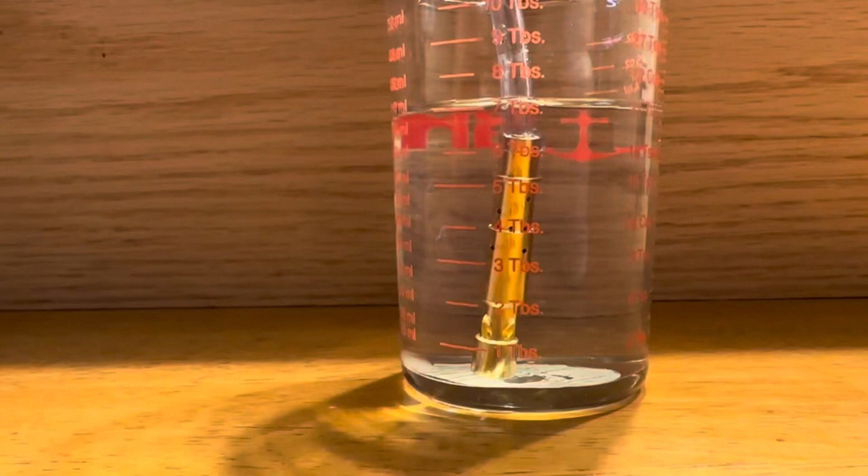All right, so this is an F11 Chinese emulsion tube, but that doesn't matter because this is basically just how fuel level and air pressure affects an emulsion tube and why it's important to set each individual location for the CFM the Venturi is seeing.

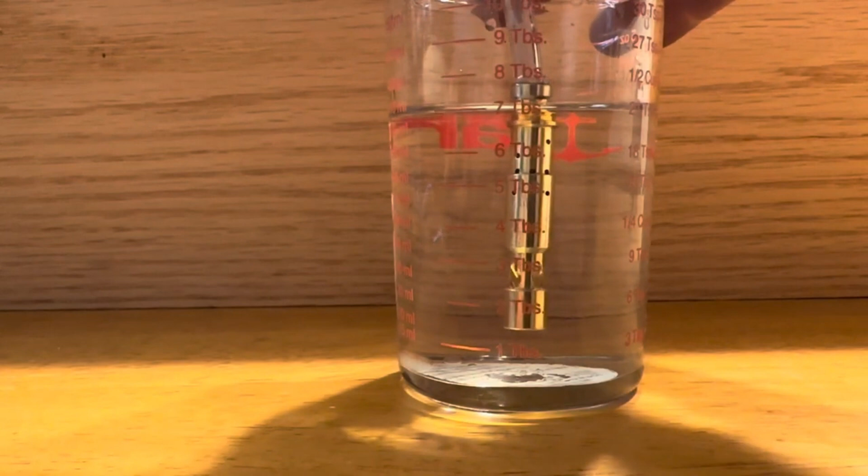So currently we have no airflow, and in the fuel chamber, the very top hole, you see right there, turn that, the very top hole there should be just below the fuel.

As your Venturi creates a pressure differential, you will start to see air introduced. This air emulsifies the fuel, pushing it much higher in the chamber and out through into the throttle bore.

As it increases in pressure, the fuel level should drop, moving to the second hole.

Now you see, if I put both under, all of the holes start bubbling. This is the situation you would have if you have not enough air for the CFM that the Venturi is seeing. It would be pulling in way too much fuel and drowning the holes, and so they would not operate properly.

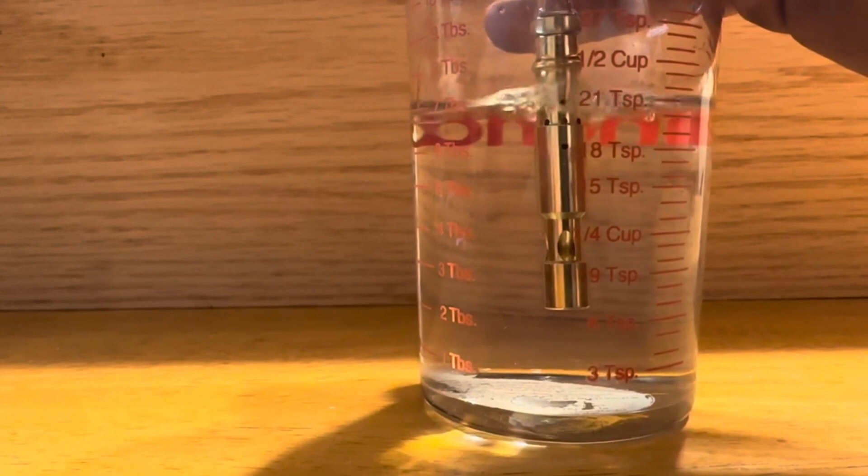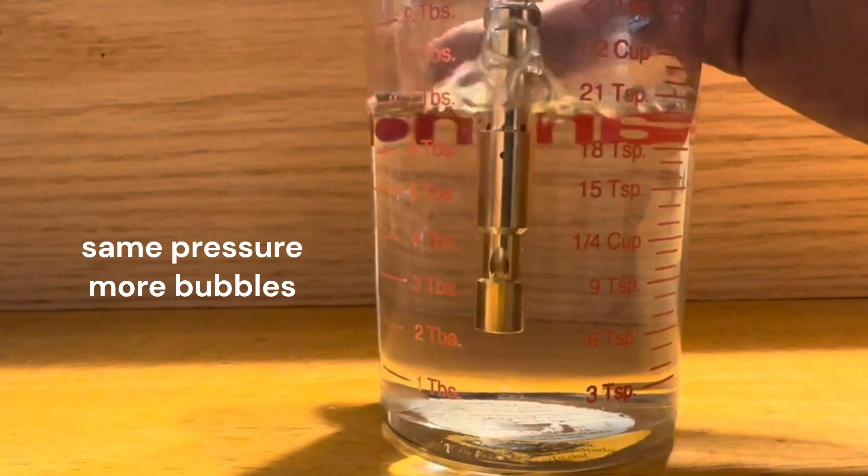And again, if we had too much, all the holes start bubbling and then you have a rich condition. So we're trying to tune each individual hole for the CFM that Venturi is seeing. That down a little bit.

And then again, if you go even higher, then you start to see the crown holes. This would be the very last CFM before you start to run mainly off of the main jet and the air idle bleed.

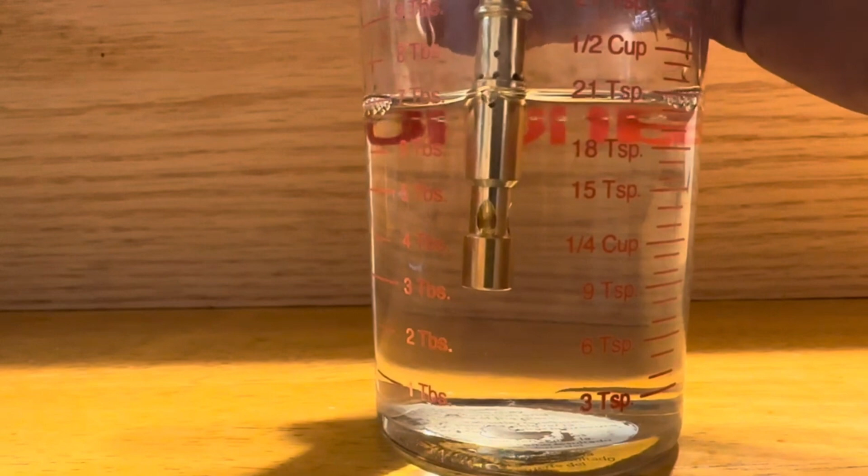If you see, the bottom holes, no matter how close they get into the top, do not bubble. Those holes are to fill the chamber when you decelerate, to let the fuel inside of the emulsion tube match what's on the outside.

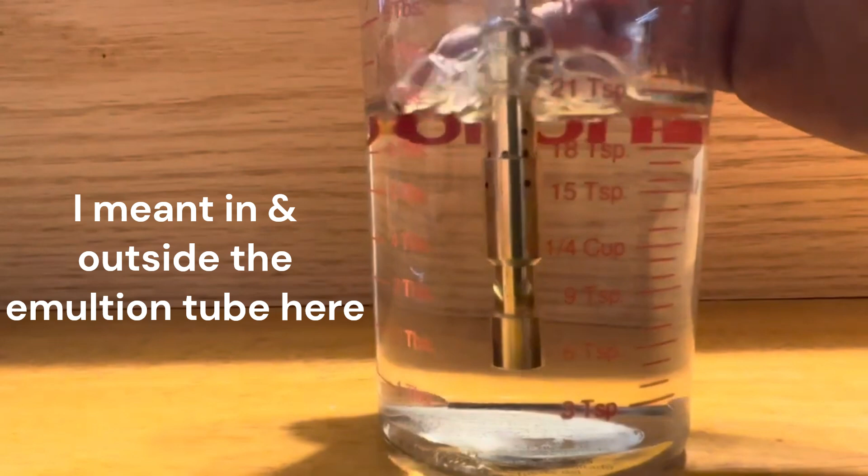Turn it down here. That will give you better fuel control.

Now under wide open throttle, I'm sure all of them bubble. Yes. Because at that point, these are no longer your metering air holes. Your air is now metered by your primary air bleed orifice.

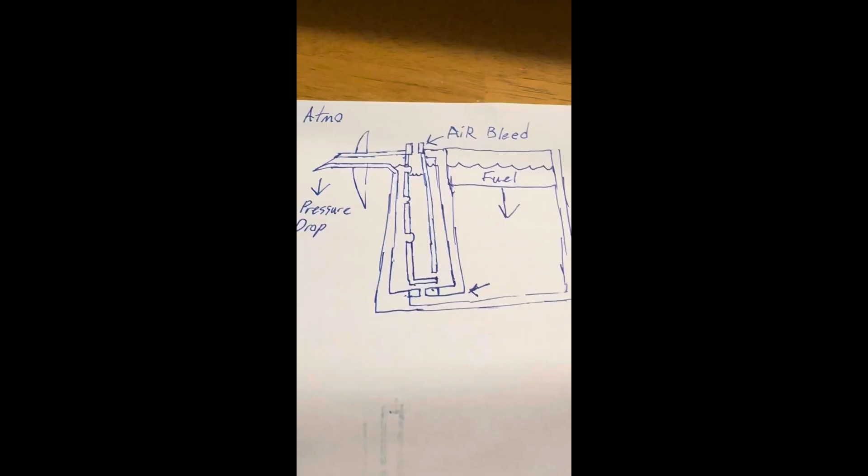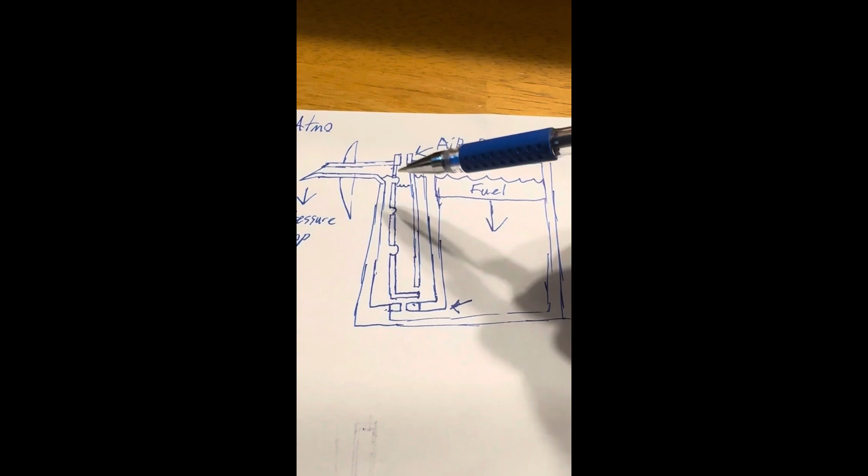All right, so here we have a diagram of the basic emulsion tube in like a Weber. We have our air bleed at the top of the emulsion tube, our main jet at the bottom. The outside of the emulsion tube fills up with fuel, but so does the inside of the emulsion tube. This would be to the Venturi.

Atmospheric pressure up here, pressure drop through the Venturi, and that's what changes the pressure on the outside of the emulsion tube.

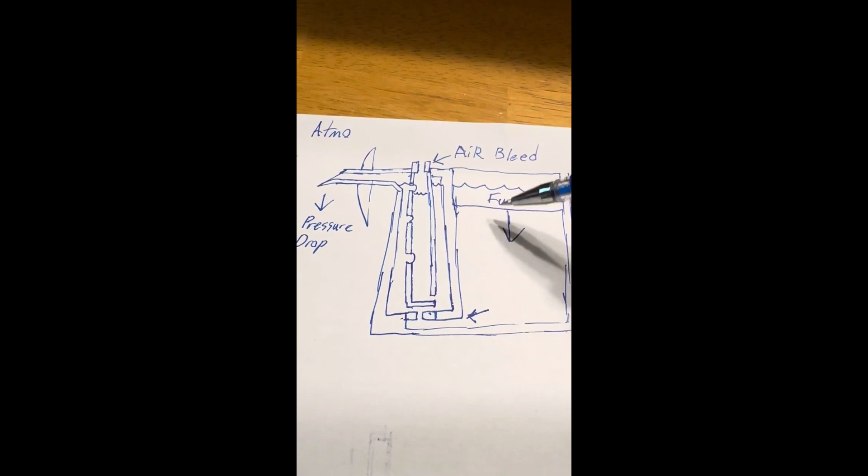Inside the fuel bowl, you have atmospheric pressure inside of the emulsion tube. Above the fuel, you have atmospheric pressure regulated by your air bleed under wide open throttle.

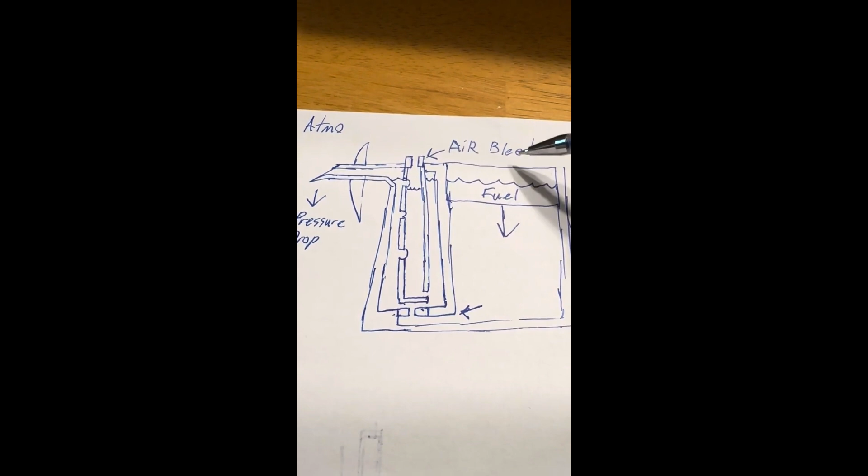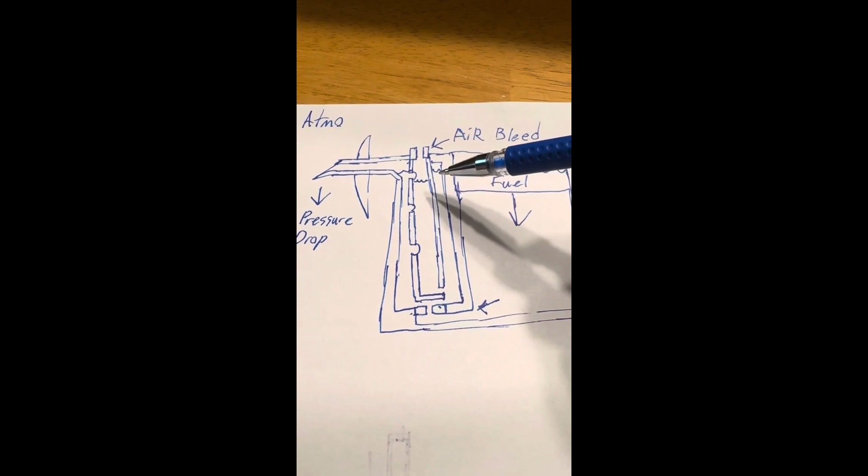As the pressure drops through your Venturi, it will lower the pressure inside the emulsion tube chamber, lower than the atmosphere in the fuel chamber. This will actually cause the fuel to rise. It will then overcome the offset of the hole, lifting the fuel above the emulsion tube hole.

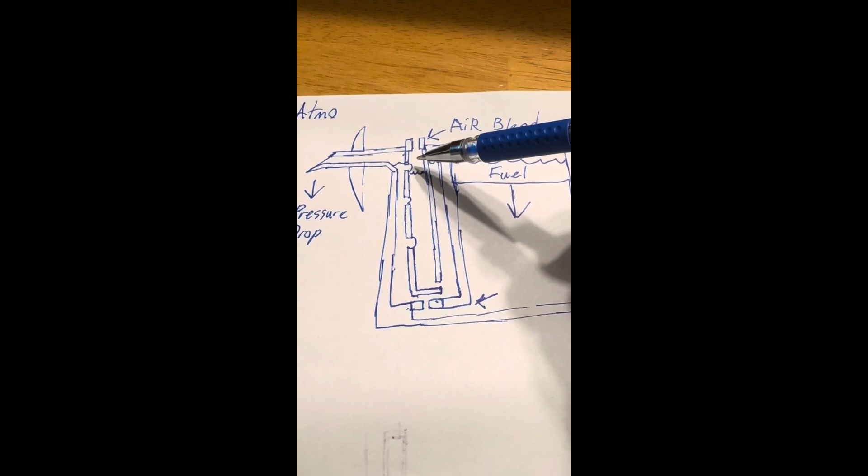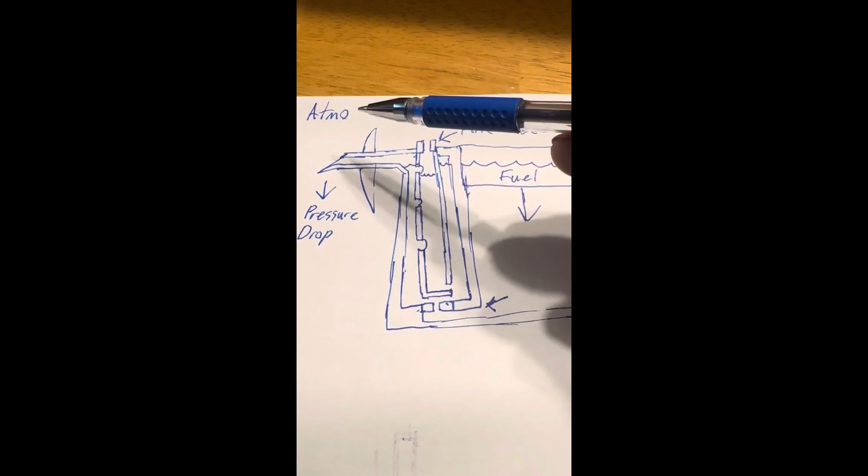This also creates a pressure drop from inside the emulsion tube to outside the emulsion tube. The air will begin to flow out of the emulsion tube and emulsify the fuel as it goes out into the Venturi. As the Venturi pressure, as the CFM through the Venturi increases, the pressure drop becomes greater.

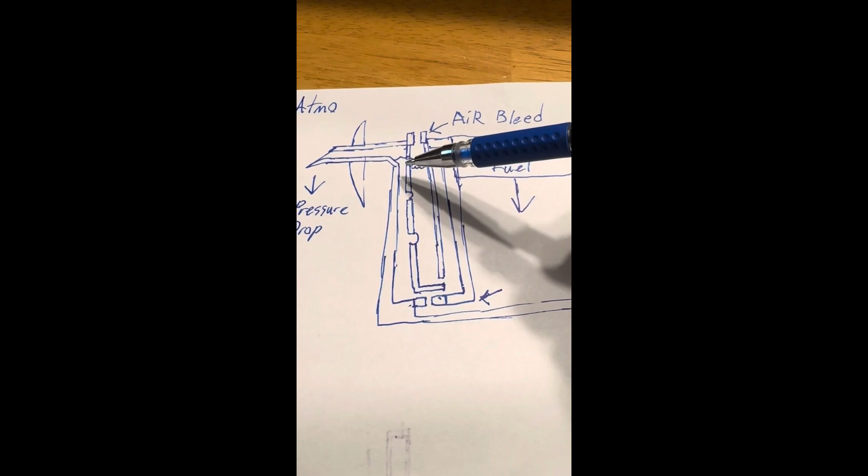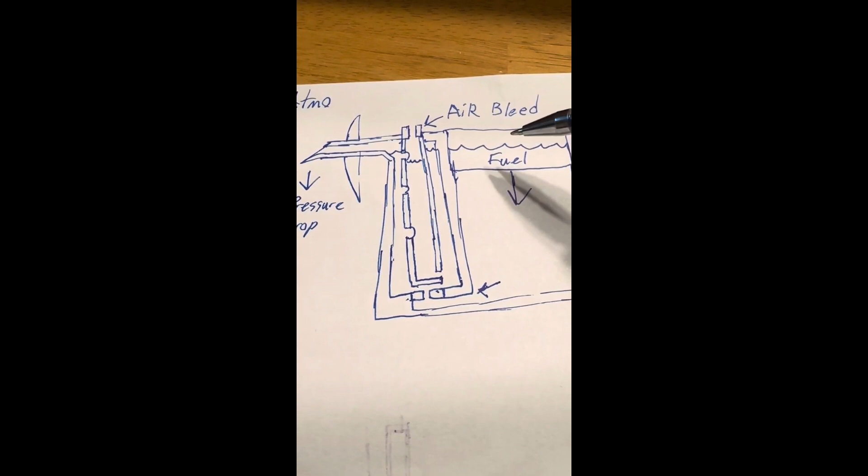Now, the trick to tuning these is you're trying to adjust your air-fuel ratio by how much air versus fuel is going through the tube. Now, this is fed from the air differential between inside the tube and the chamber, and that is adjusted by how many holes you have in your emulsion tube.

If you have one hole, it may overcome the hole, and like you saw in the video, more holes will start to flow because the fluid inside the emulsion tube will be pushed out, because this is the smaller diameter, so it takes a lot less pressure to push it out.

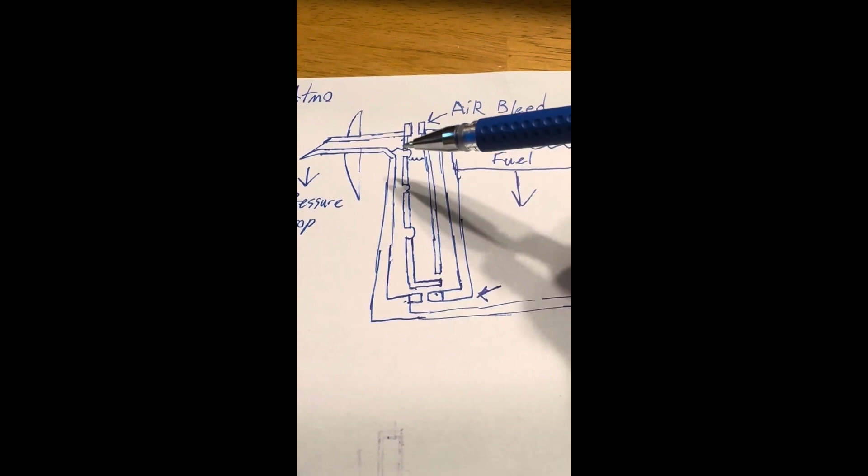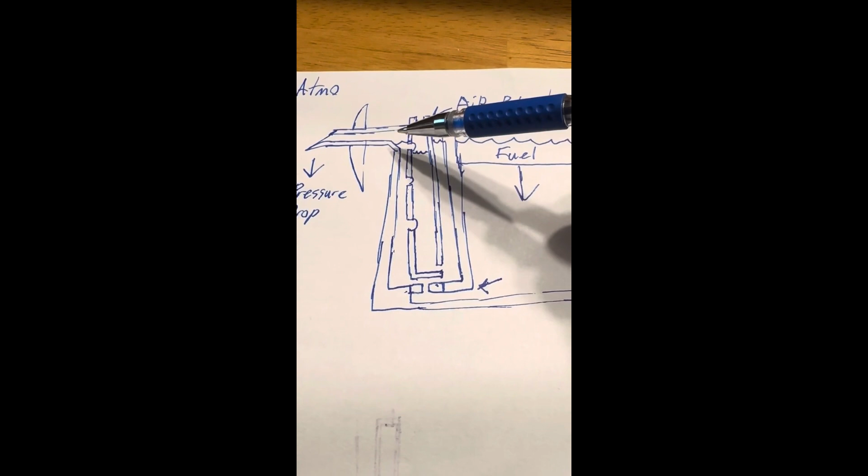If you have enough holes at your set CFM, so you have, say 30 CFM going through this, it's gonna have a set amount of pressure it drops. And that is what you try to tune this hole for. Not necessarily 30, that's just an arbitrary number I'm picking.

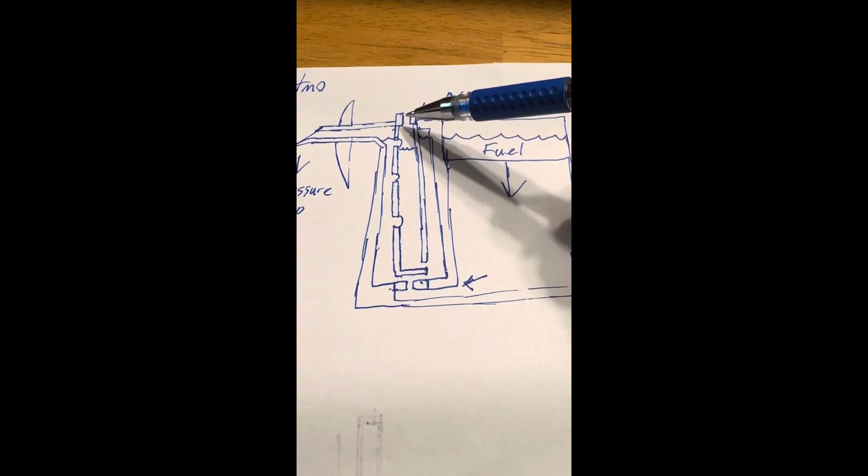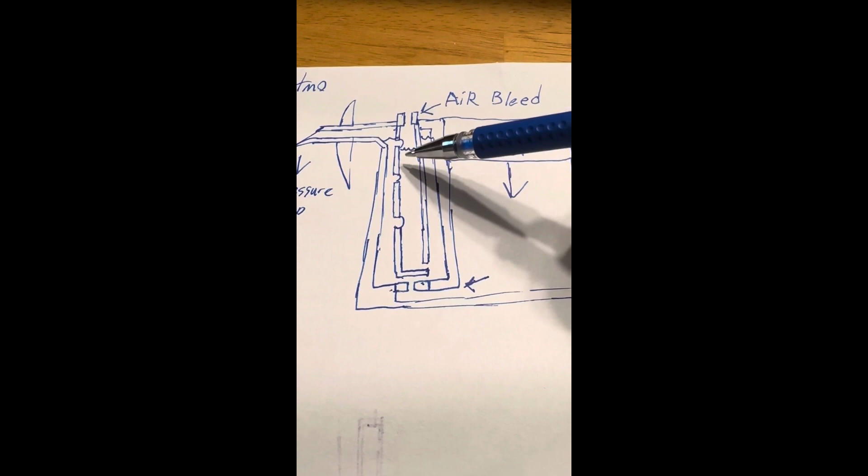Now this hole is going to have a range. As the fuel comes up, the range is going to be dictated by the internal level of the chamber, or of the emulsion tube.

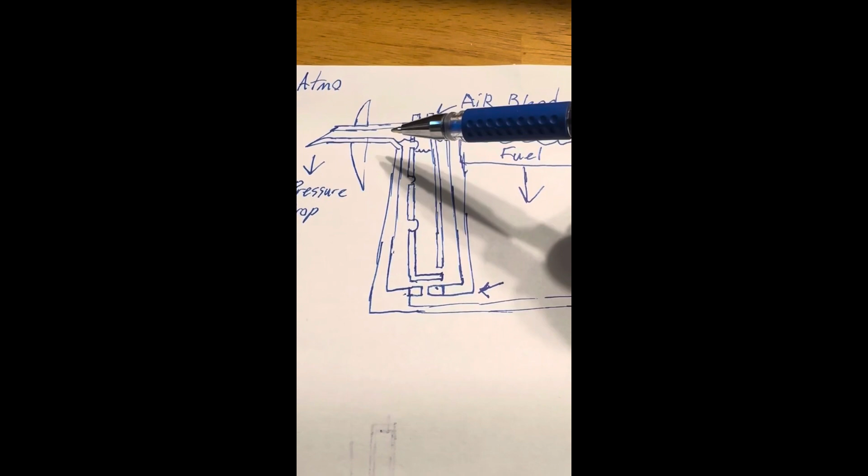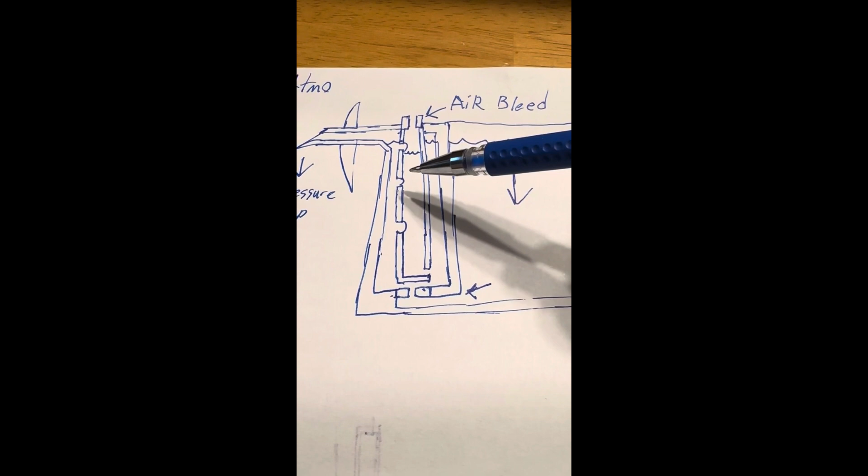As the CFM increases, the pressure differential between these two increases, providing more fuel and lowering the fuel level. So you will have a slight rich increase between this hole and this hole. So as this is transferring down to the secondary hole, you're going to have a slight enriching happen between the two holes.

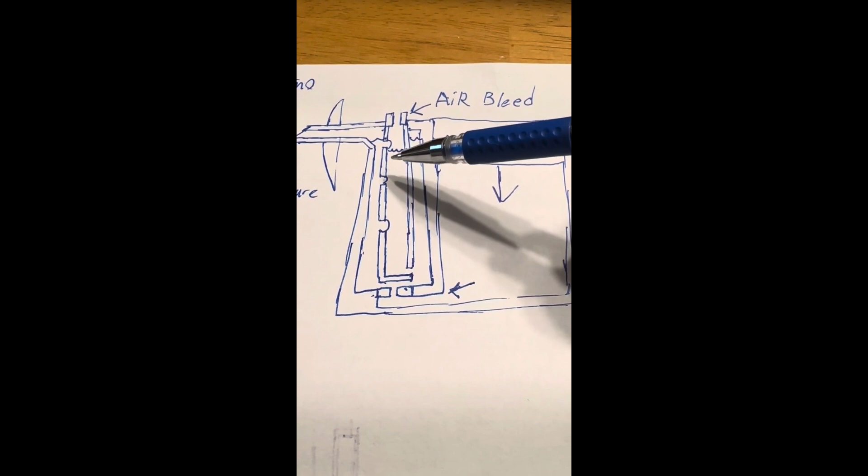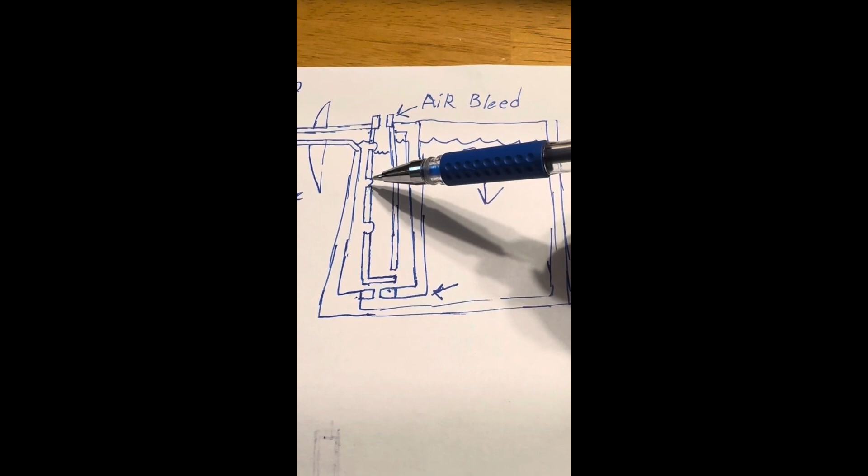Once this level drops to the point where this hole is, it will emulsify and push everything above it out, clearing this hole. You might have a little bounce back and forth, but you are now primarily off of this hole. This continues all the way down to the third hole. This is how you're tuning your emulsification tubes.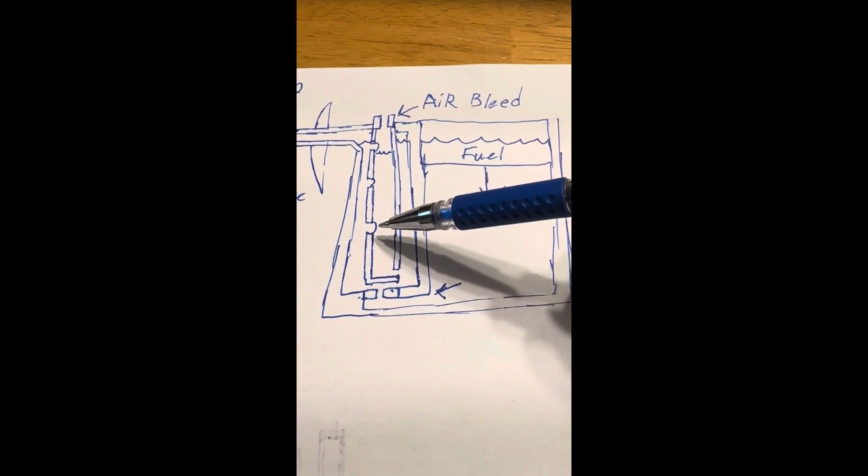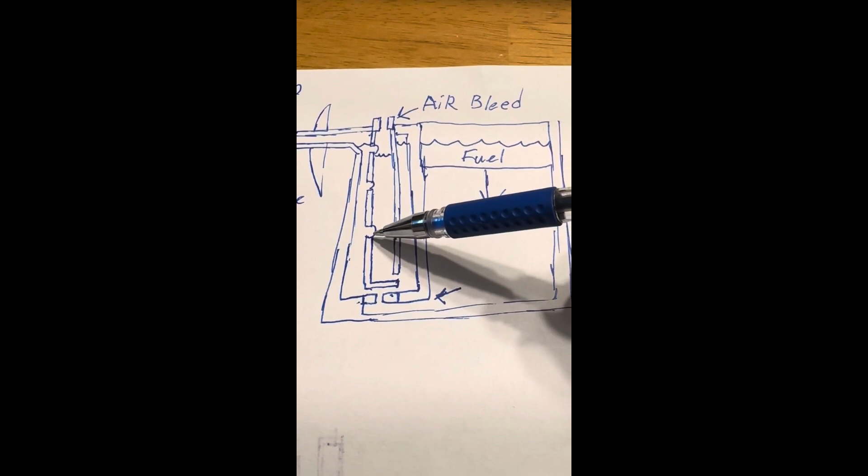If you're getting down to the very bottom hole, this hole here is to allow fuel in, so when you're letting off throttle, it fills back up with fuel and closes off these circuits for the air and helps regulate pressure.

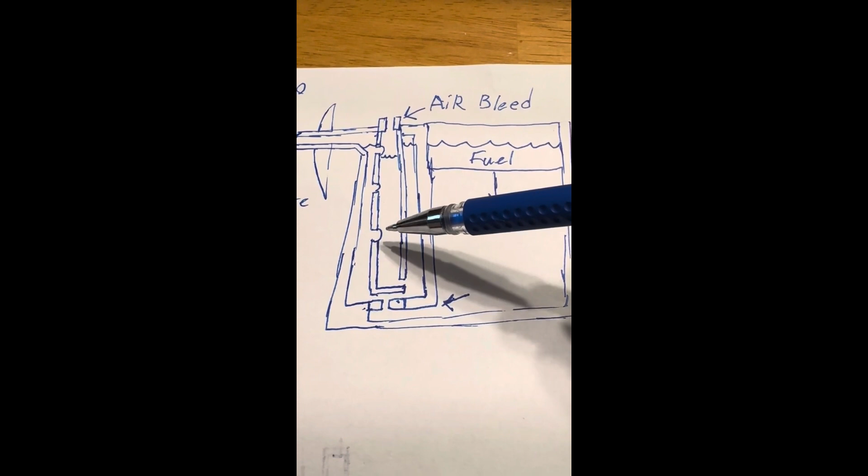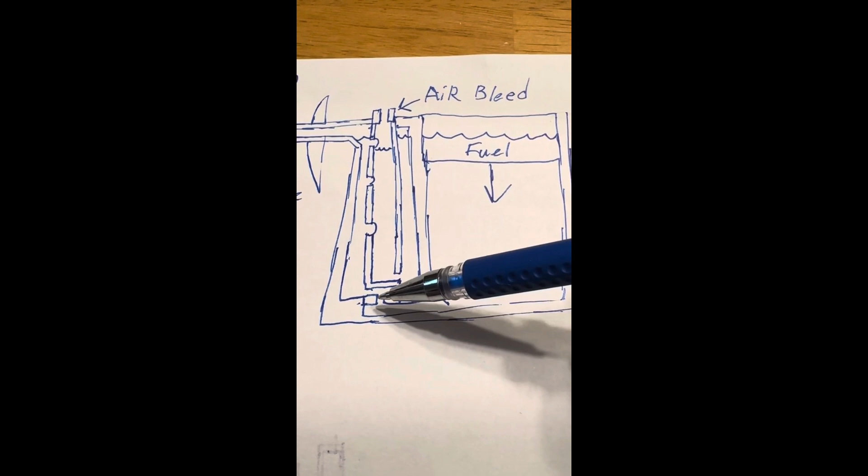Once you get down to here, once you run out of holes, there's no more adjustments you can make, and you're going to be running off of your air bleed diameter and your main jet diameter. So these should be set as if this doesn't exist.

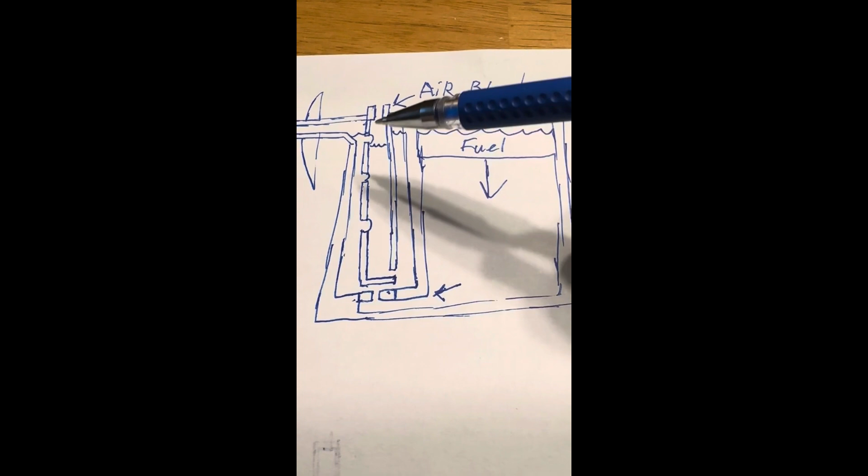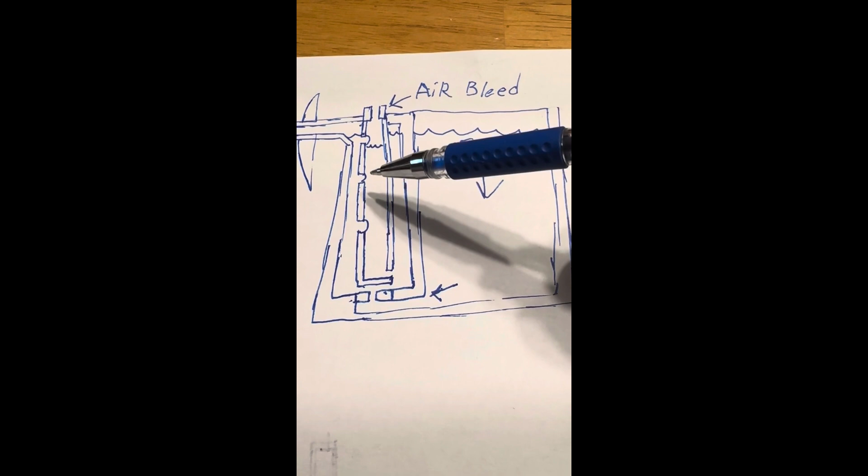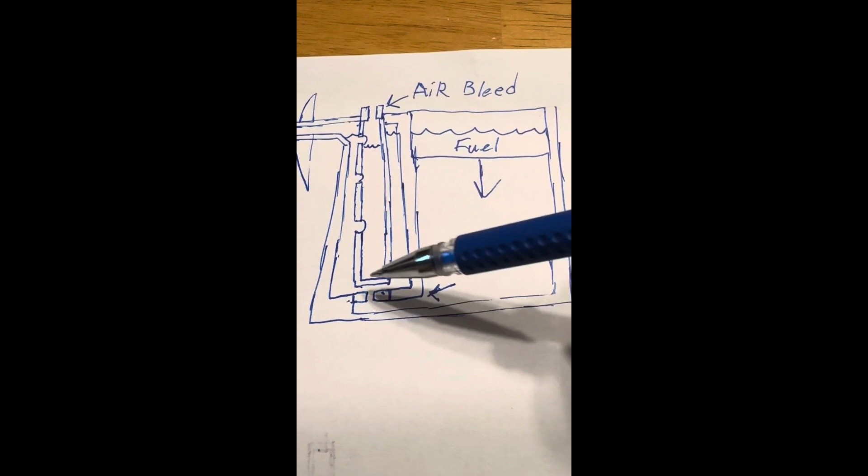You only have enough airflow regulated by your air bleed. You may run out of air bleed by the second hole, meaning this hole is not helping you tune your carburetor. This hole is only functional at wide open throttle and really doesn't do anything for you, because it doesn't matter how many holes you have in this if that doesn't flow enough.

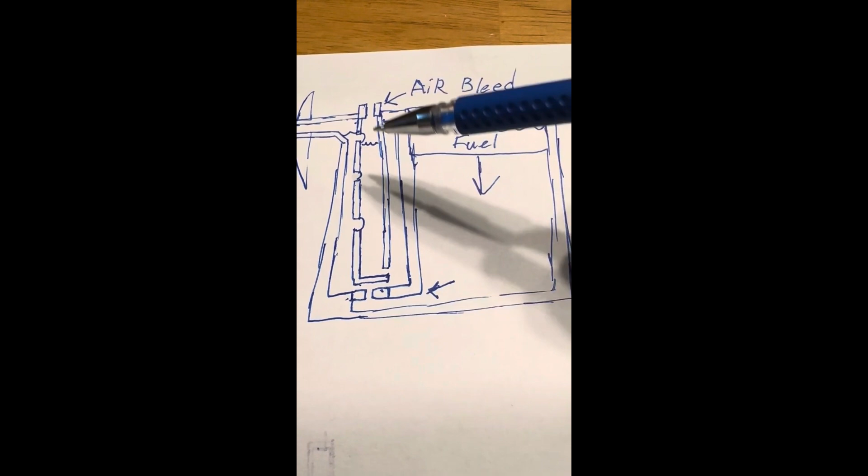So that is the limiting factor to how well you can tune these. You only have this much air for this much jet. Once you reach the maximum amount of air to jet ratio, it doesn't matter how many holes you have. So you have a limited amount you can put in. So you gotta plan it out wisely.

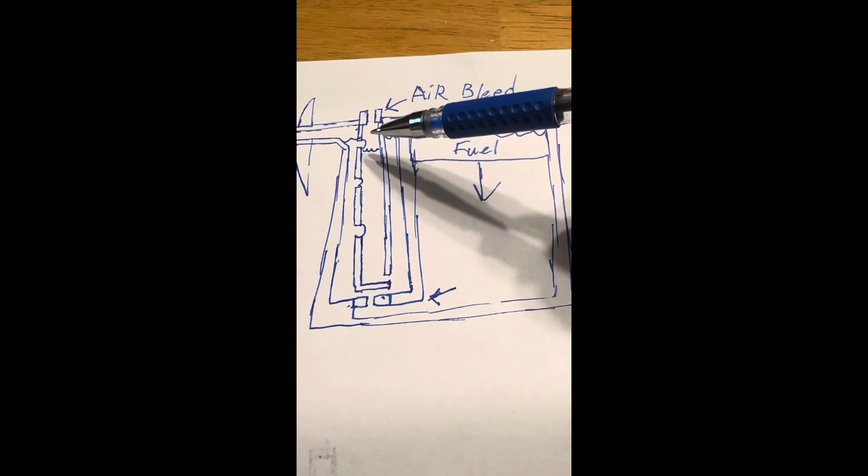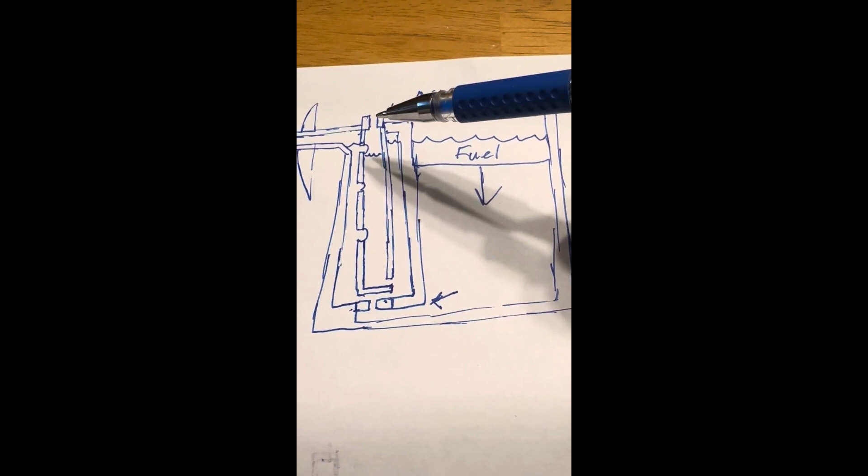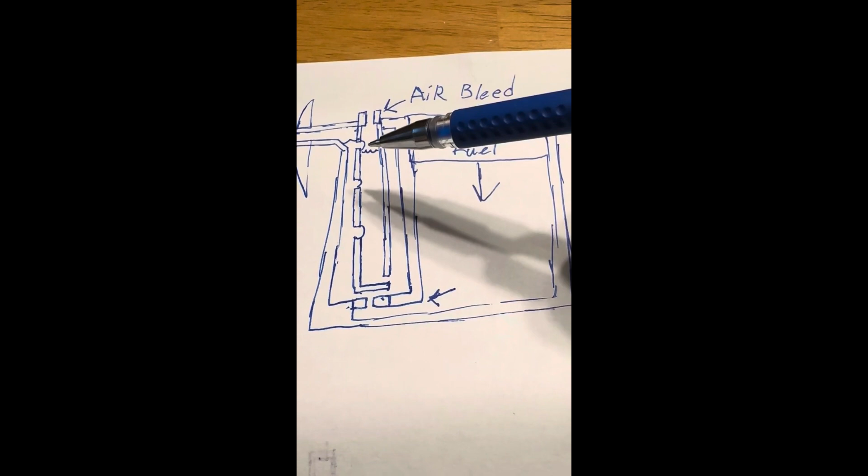So you don't want to just tune it per 100 RPMs. You know, you could, if you had a big enough tube and a big enough air inlet and a big enough jet and enough CFM to pull all of that out. But you don't. That would be ridiculous. You usually have about 3 to 4, sometimes 5 holes to do this with.

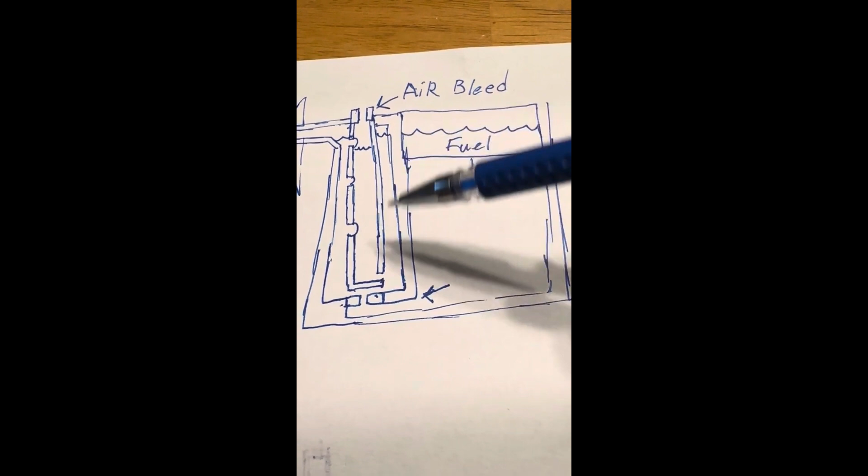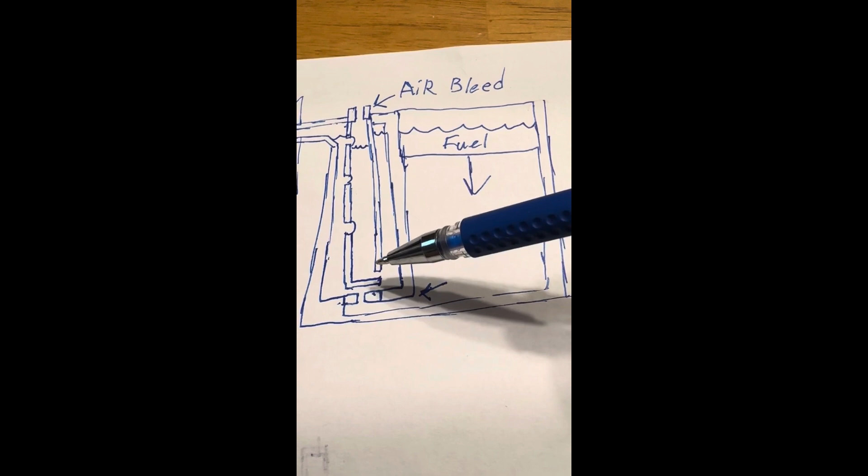Now on Holleys, they have a totally separate circuit and it's not metered the same way. They're strictly just air holes and the fuel level changes in the chamber. I don't believe there's any fuel inside, and if it is, it's backflowing through the lower jets. Which this could too, like maybe once you get down here, you might see a little change in fuel ratio due to the smaller lower hole. But by the time you pass this, you're probably out of air here.

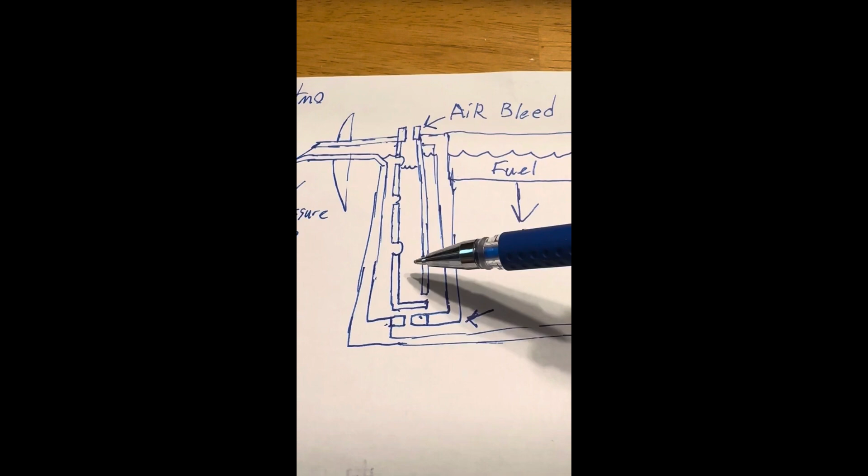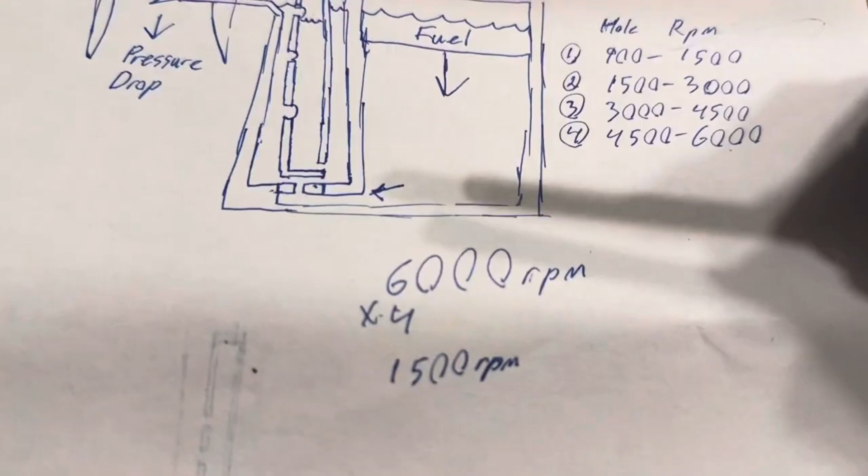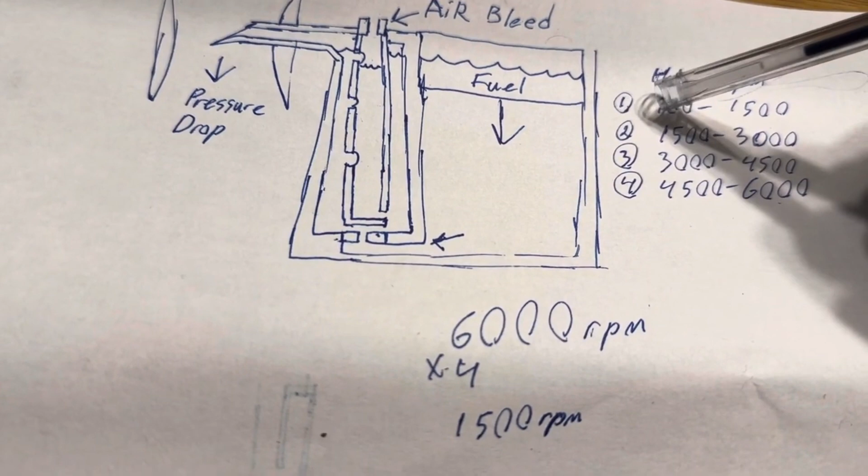So how do you tune this? Well, you want to set the RPM range for each set of holes. You could divide your max RPM by 4, because you have 4 holes - 1, 2, 3, and 4. So you're wanting to do your first jet from 900 to 1500. I guess you could start your RPM range at 900, and then the numbers would change, obviously. This is just an example.

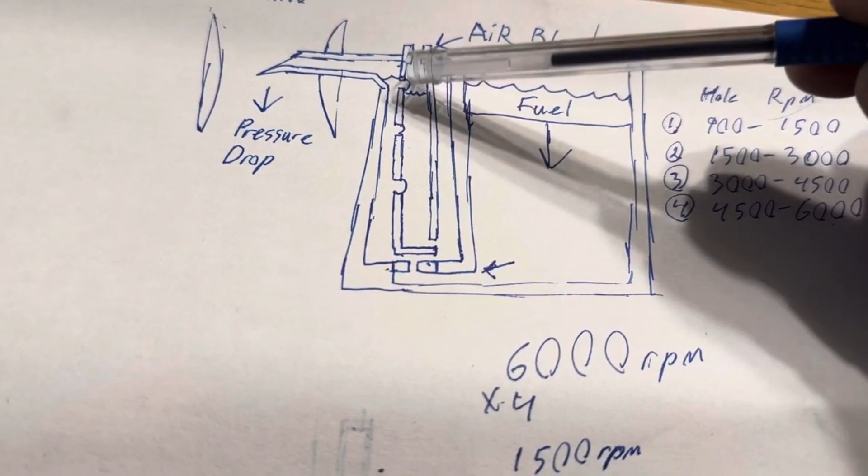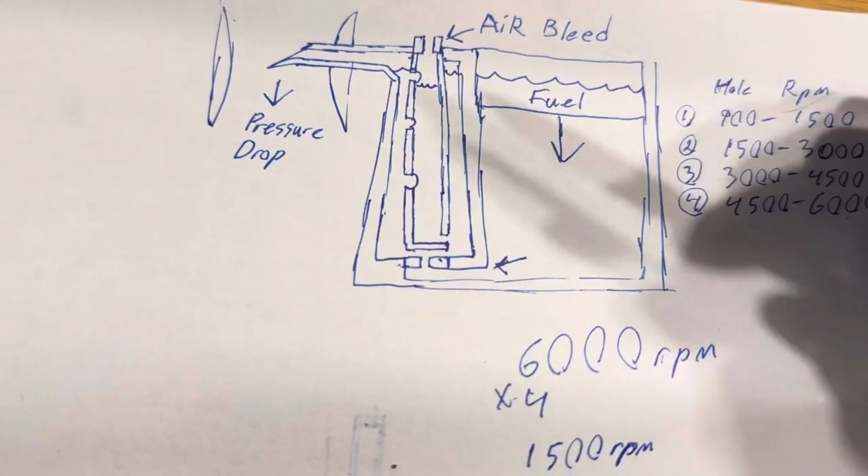Well, how do you know that the air you're getting is from just this hole and it's not being overpowered, and the fuel level is dropping and you're just sucking out of the lower holes? Because there's no way to visibly see this happening. You have to block off all of the lower holes and tune one hole from the top down.

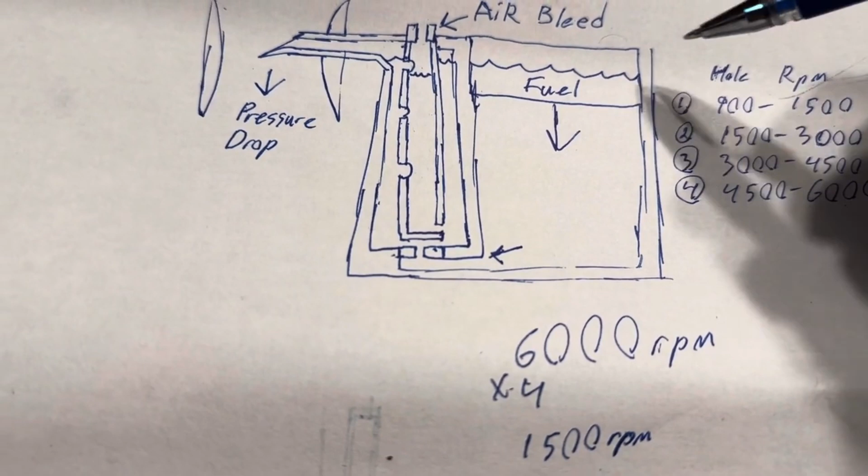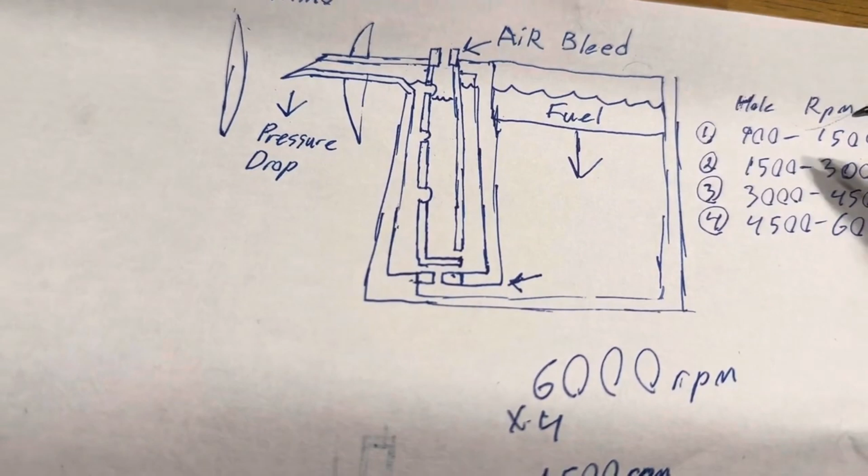Starting with the first hole, you go to your selected RPM range for that hole. Start with one hole. Start the car, give it the condition you want this hole to operate in the RPM range, and watch your air-fuel ratios.

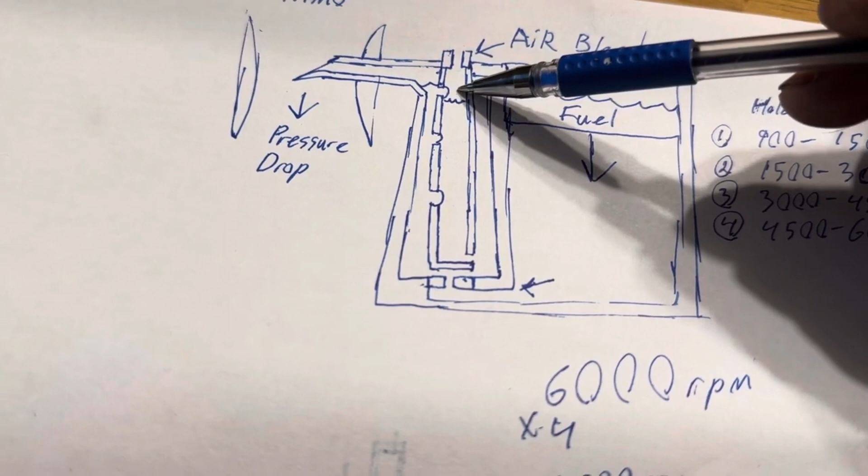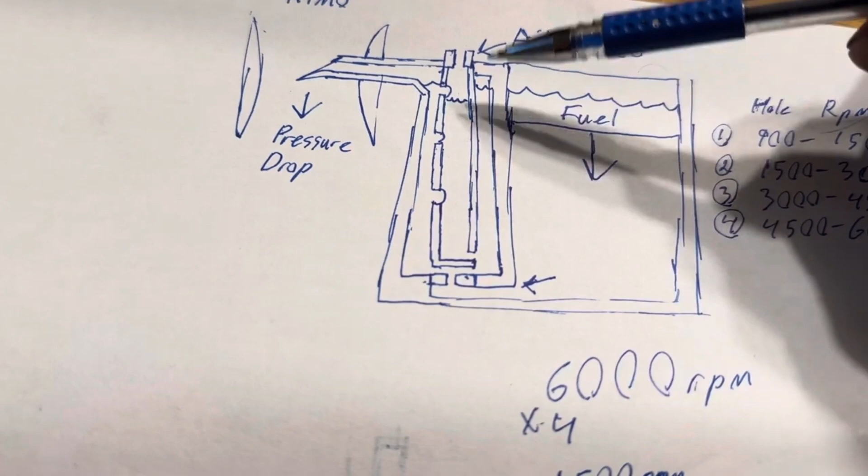If it's immediately rich, add more holes. Now, why does it go rich? Well, because the main jet and the pressure differential between the two will overpower the hole, and then you're just getting more fuel, less air. And this hole is smaller than this hole, by far.

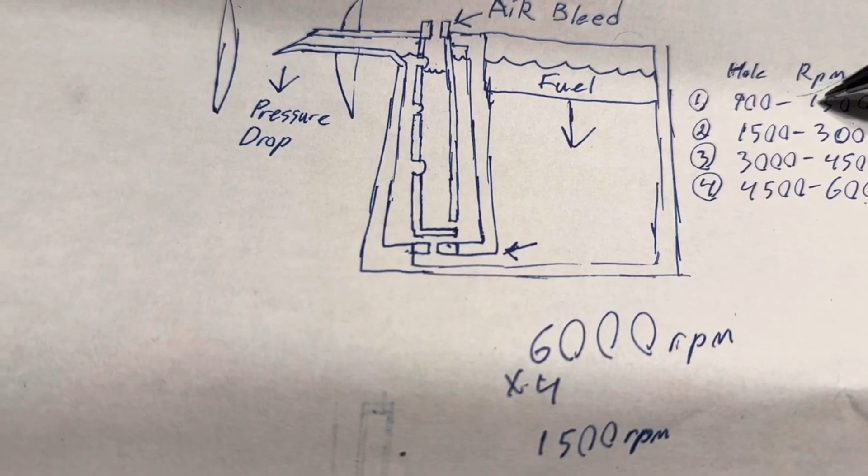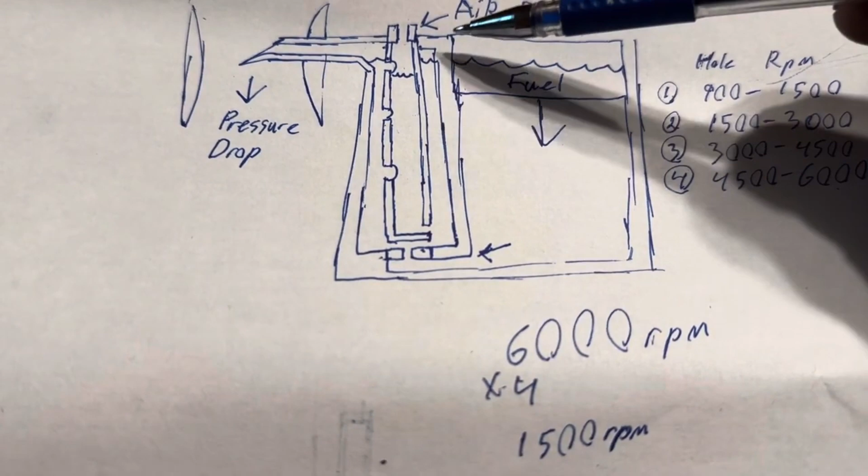So to reach your intended goal RPM, your high RPM through this hole, you need to add more holes. Once you're satisfied with the amount of holes in this, you shouldn't go too crazy with how much RPM you're trying to get out of this hole, because that's going to limit how far down the emulsion tube you can go and how many sets of holes down the emulsion tube you can go.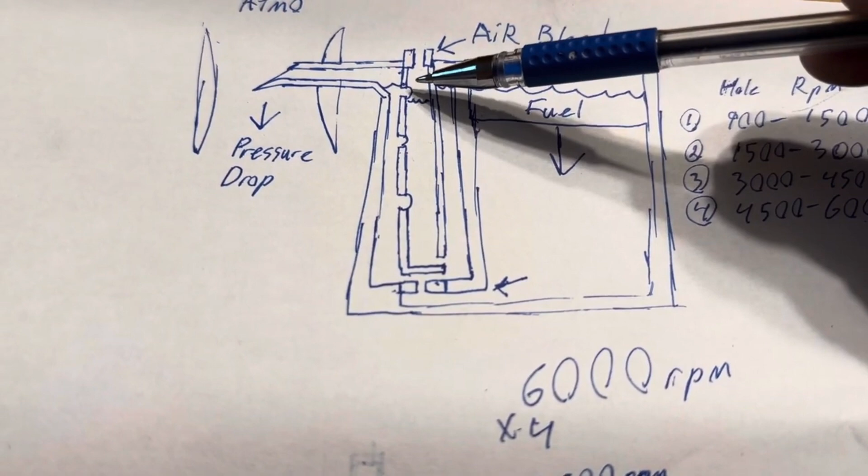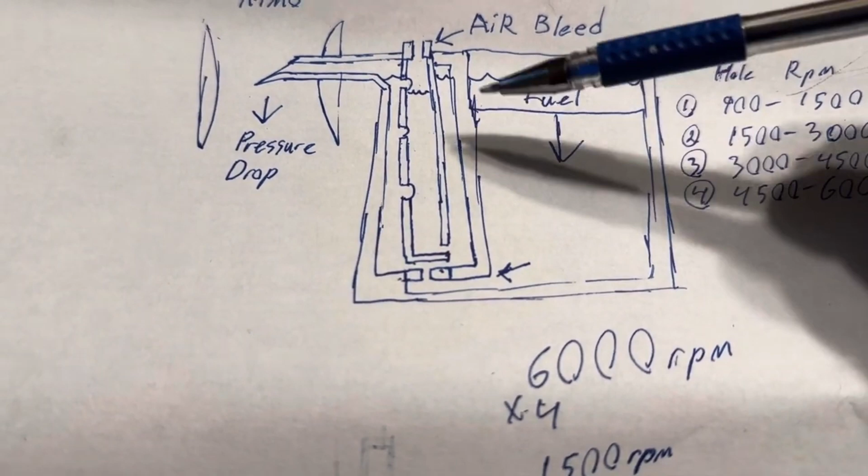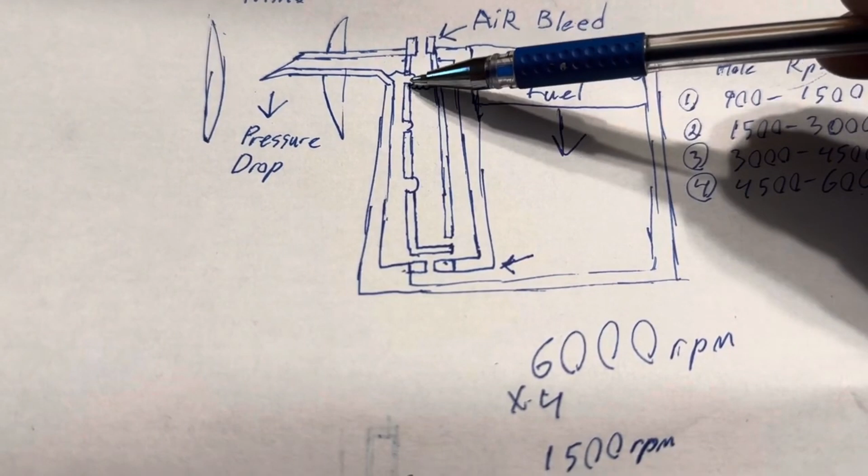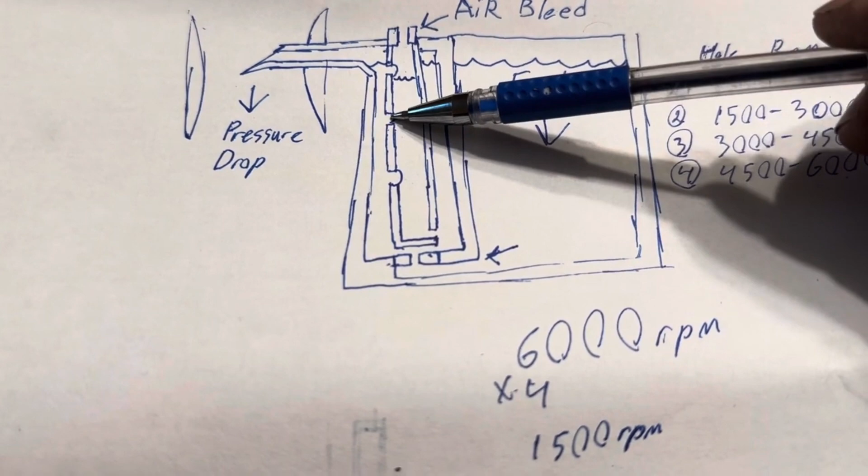Once you're satisfied with that, you can unblock the next hole and tune the next RPM range. So you'll be running off of this hole because you know it flows enough to do your desired RPM range. Once you reach the next RPM range, it will start pulling air out of this hole, leaning the condition and preventing that rich condition that you saw originally.

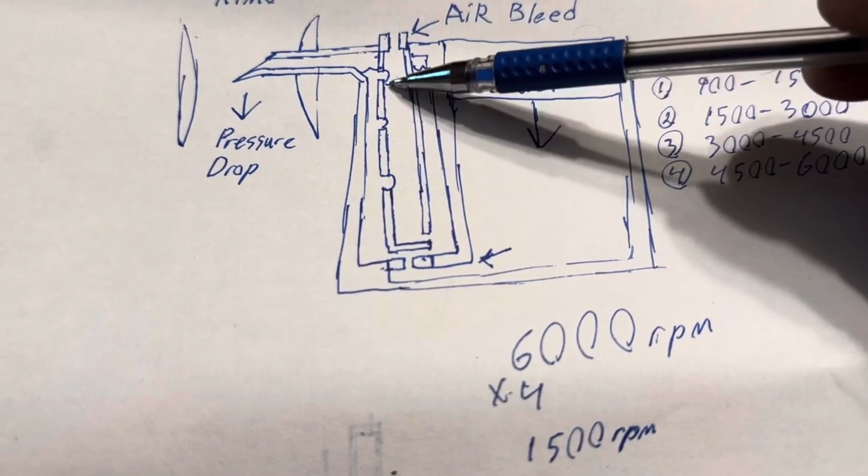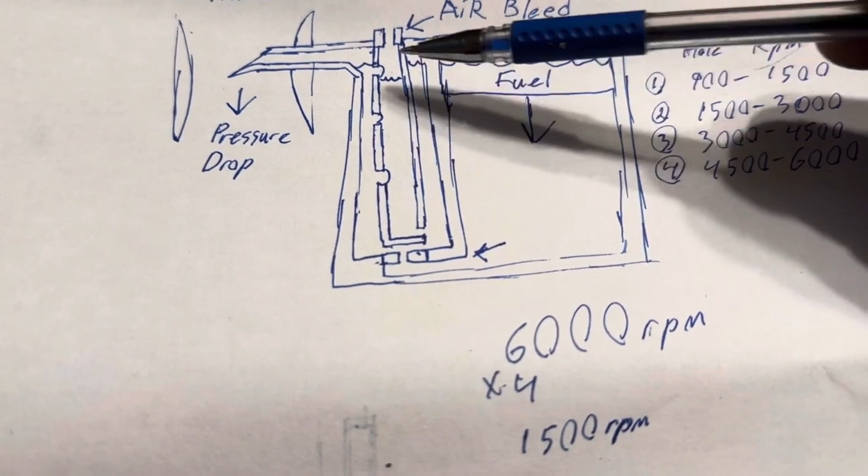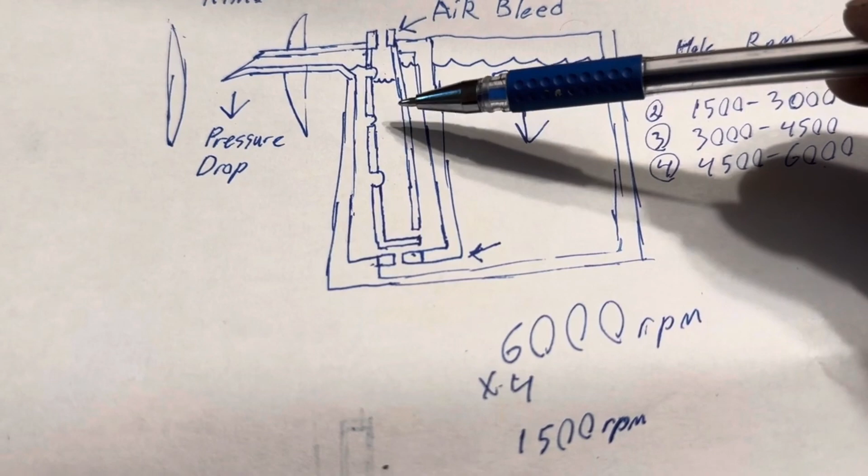And then you're repeating the process. You're bringing that RPM range in hole 2 to your next arbitrary RPM range that you think you can get out of this hole without running out of air up here. You put as many holes as you think you need, starting with 1, just slowly add 1 at a time until you can achieve the RPM, the CFM through the venturi that you're wanting this hole to control.

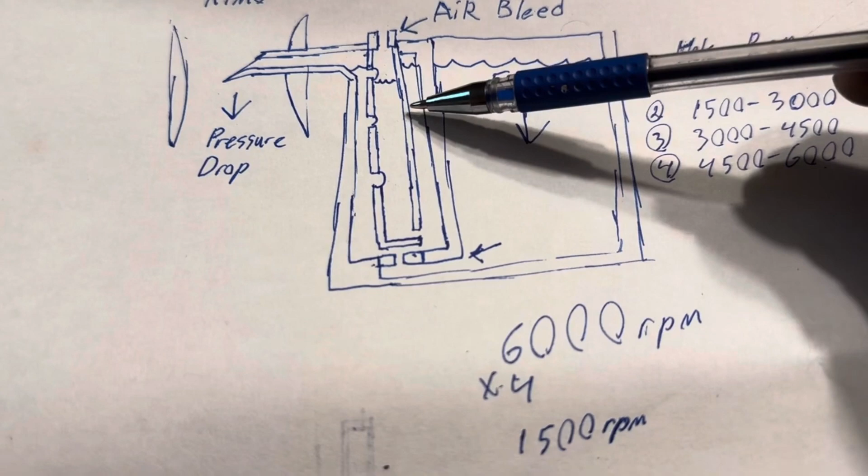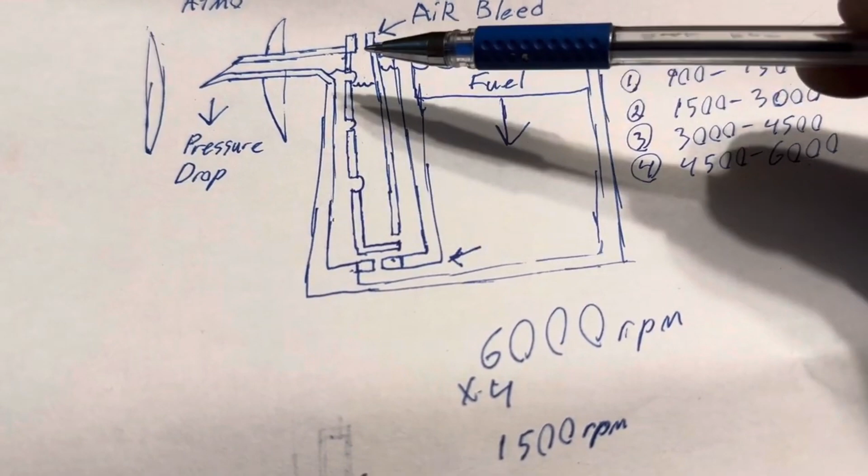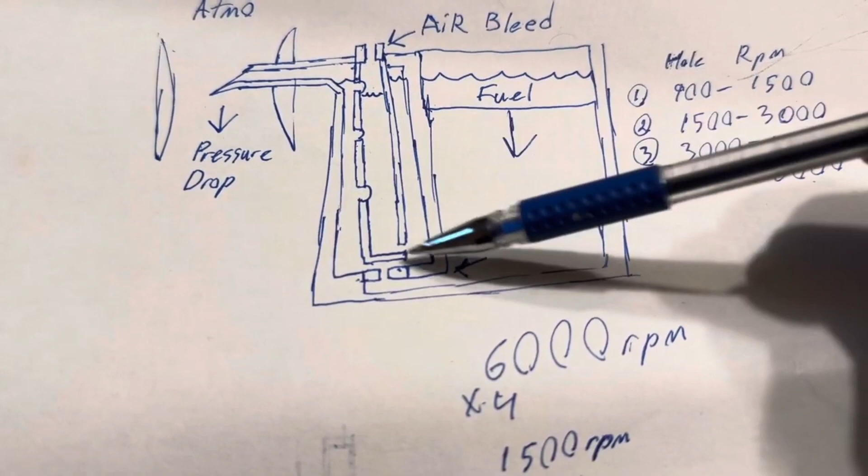Again, repeat the process, unplug this hole, repeat the process here. This hole you don't really have to worry about because that's going to be under wide open throttle. So really the only way to tune it is to make sure you're not taking air from anywhere else but the hole you're trying to tune, or the range in the emulsion tube you're trying to tune.